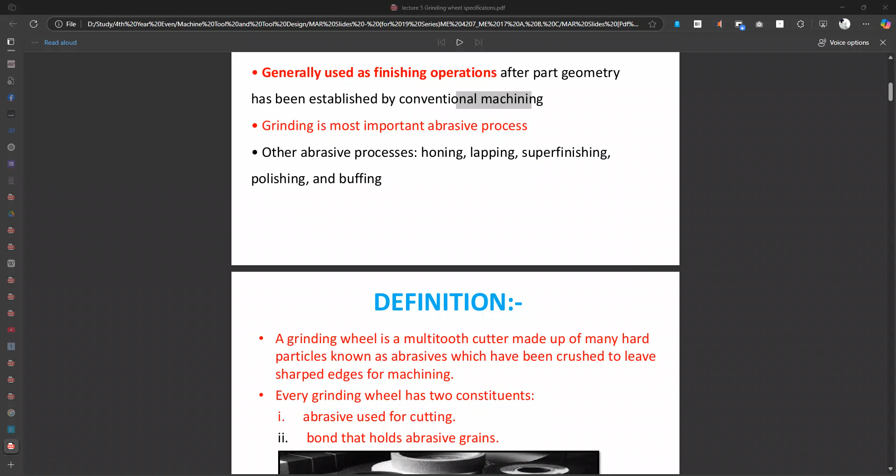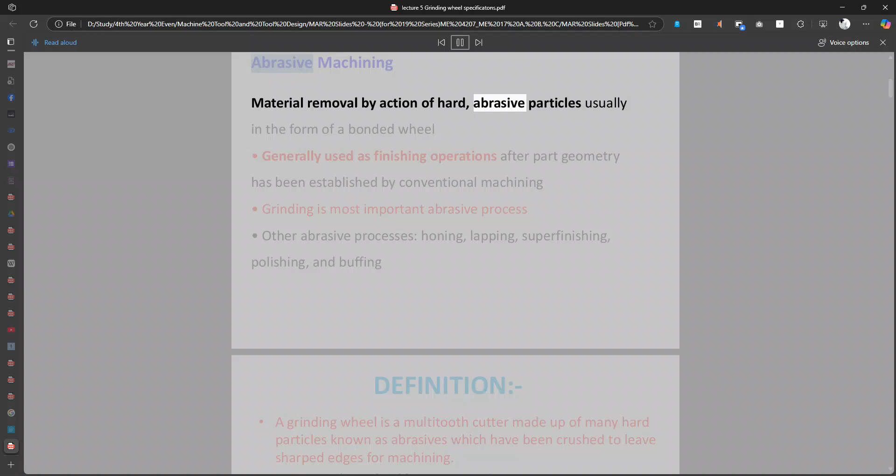Material removal by action of hard, abrasive particles, usually in the form of a bonded wheel, is generally used as a finishing operation after part geometry has been established by conventional machining.

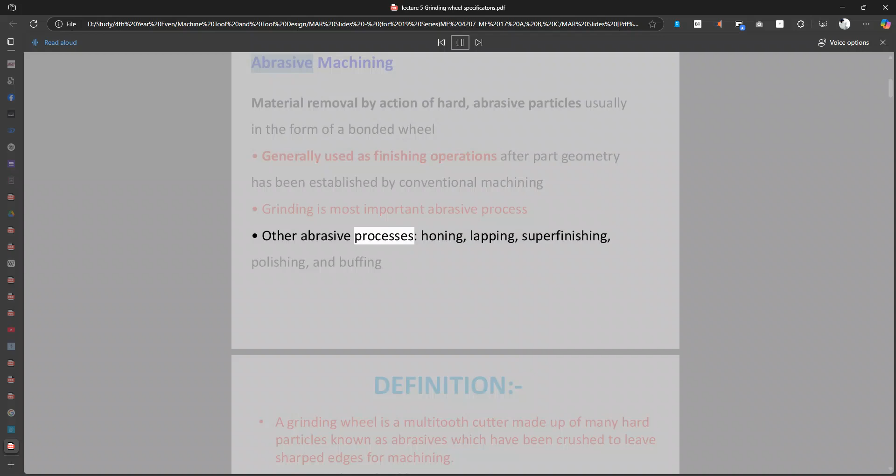Grinding is the most important abrasive process. Other abrasive processes include honing, lapping, superfinishing, polishing, and buffing.

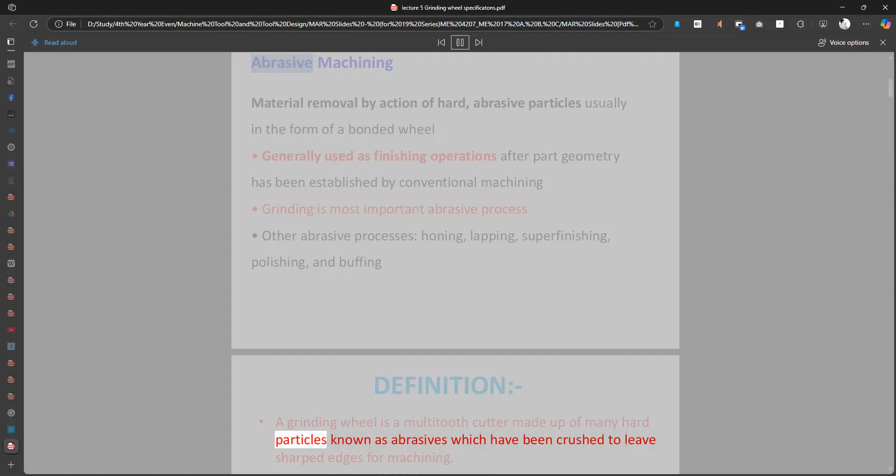Definition: a grinding wheel is a multi-tooth cutter made up of many hard particles known as abrasives, which have been crushed to leave sharp edges for machining.

Every grinding wheel has two constituents: the abrasive used for the cutting point, and the bond that holds the abrasive grains.

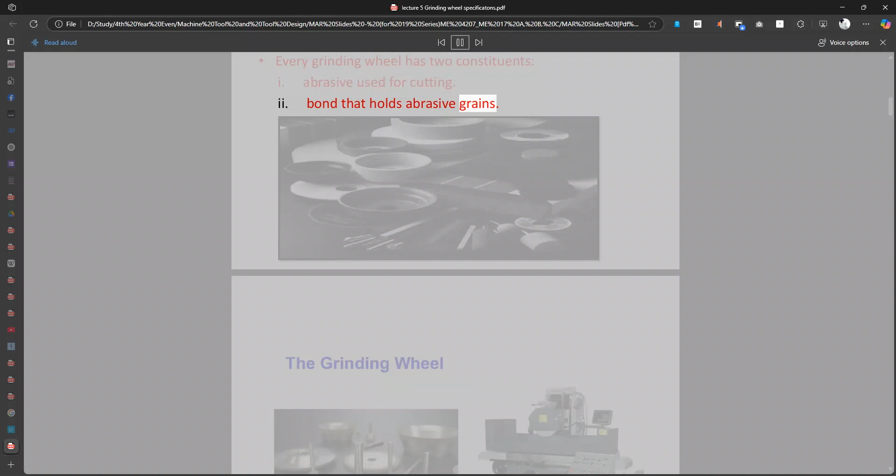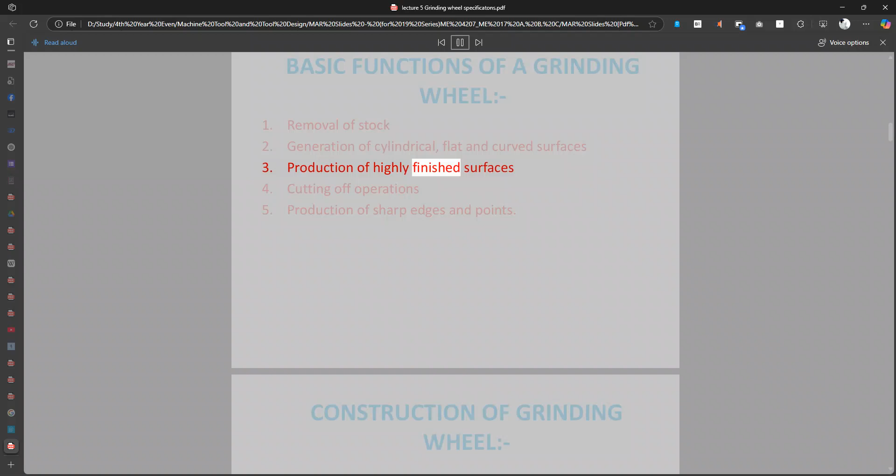Basic functions of a grinding wheel: 1. Removal of stock. 2. Generation of cylindrical, flat and curved surfaces. 3. Production of highly finished surfaces. 4. Cutting off operations. 5. Production of sharp edges and points.

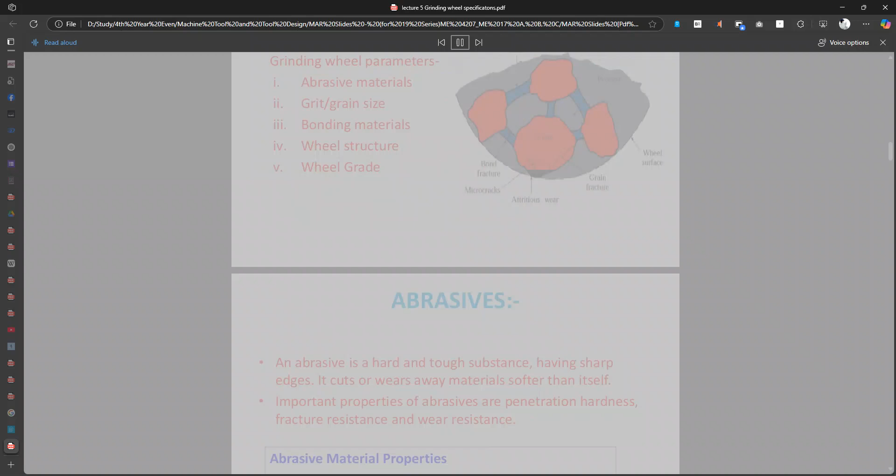Construction of grinding wheel. Grinding wheel parameters: abrasive material, grit or grain size, bonding material, wheel structure, and wheel grade.

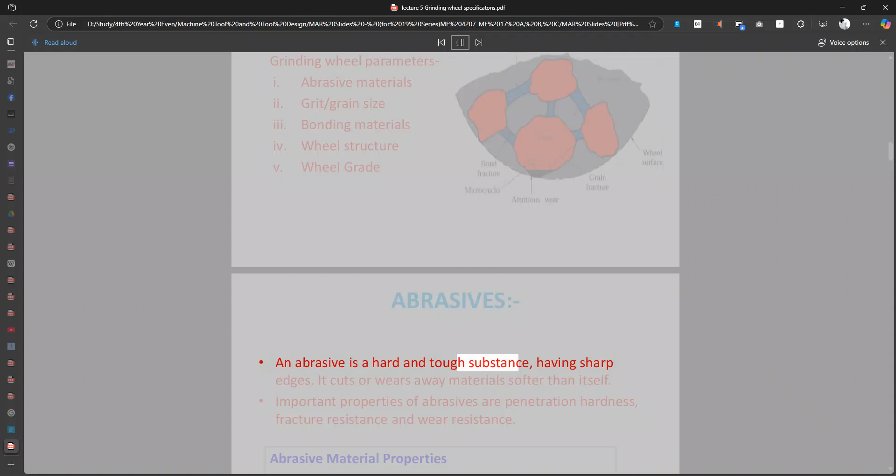Abrasives: an abrasive is a hard and tough substance, having sharp edges. It cuts or wears away materials softer than itself. Important properties of abrasives are penetration hardness, fracture resistance, and wear resistance.

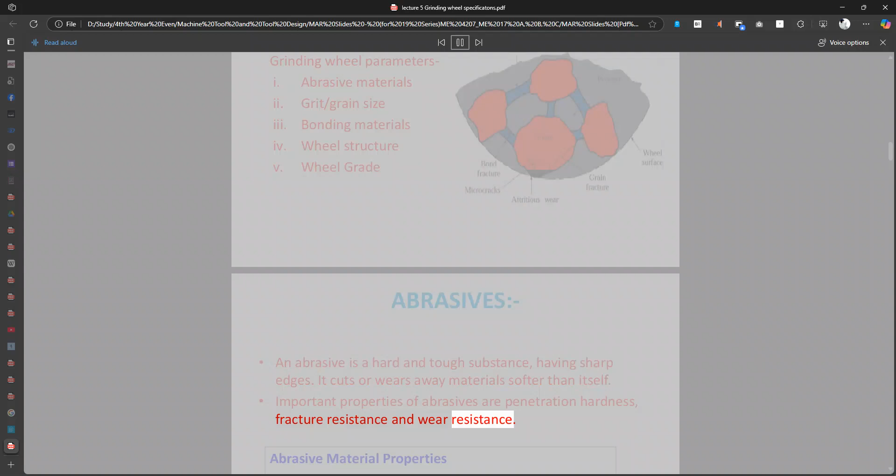Abrasive material properties: high hardness, wear resistance, toughness, and friability—the capacity to fracture when the cutting edge dulls, so a new sharp edge is exposed. Abrasive-workpiece material compatibility: the affinity of an abrasive grain to the workpiece material is important.

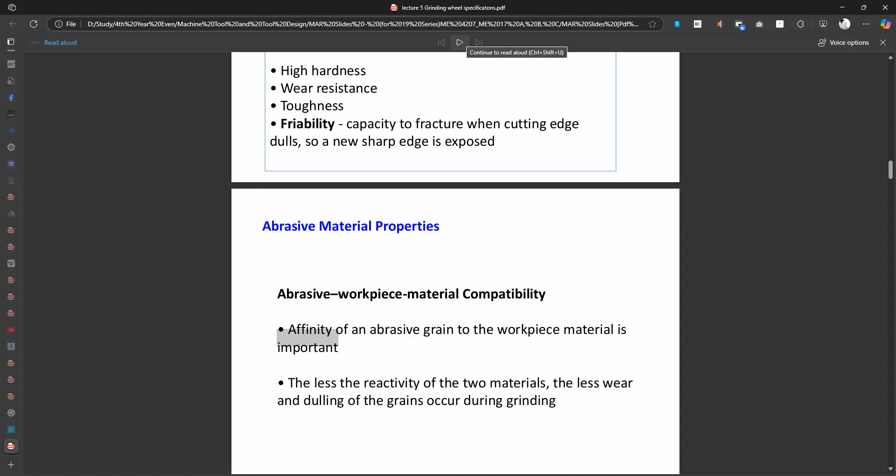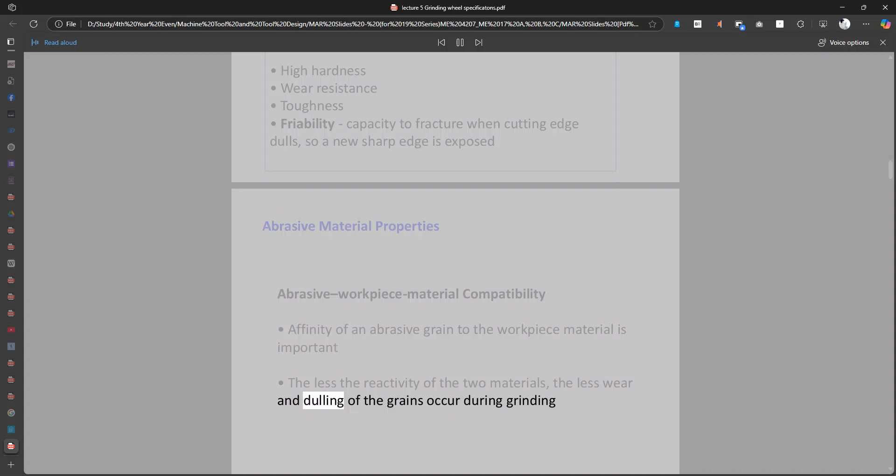The less the reactivity of the two materials, the less wear and dulling of the grains occur during grinding.

Abrasive material properties. Types of abrasives: natural abrasives, obtained from nature. Natural abrasives include sandstone, emery, corundum, diamond and garnet.

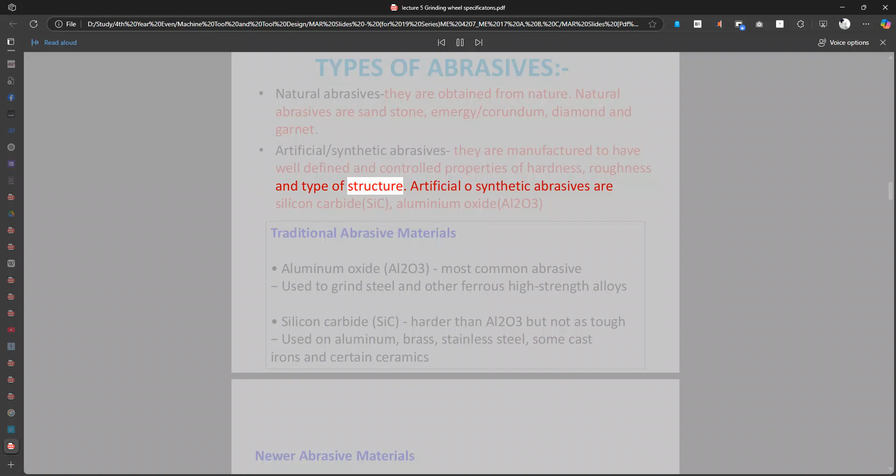Artificial or synthetic abrasives are manufactured to have well-defined and controlled properties of hardness, roughness, and type of structure. They include silicon carbide (SiC) and aluminium oxide (Al2O3). Aluminium oxide is the most common abrasive used to grind steel and other ferrous high-strength alloys.

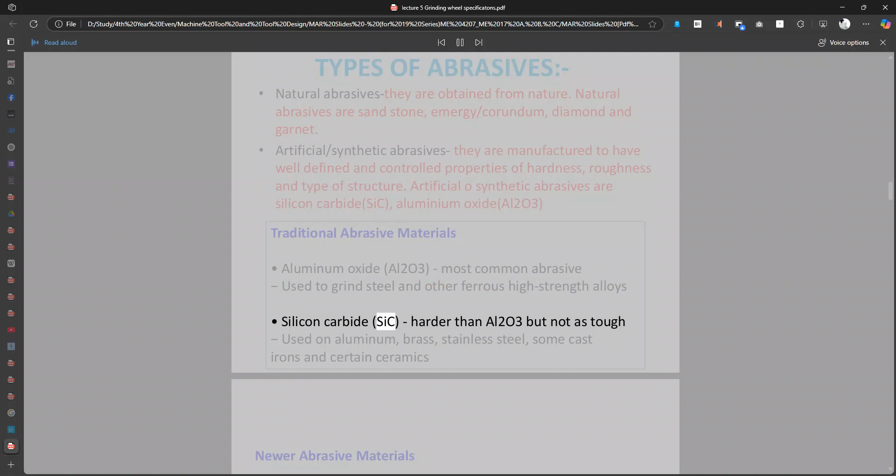Silicon carbide (SiC) is harder than Al2O3, but not as tough. It is used on aluminum, brass, stainless steel, some cast irons and certain ceramics.

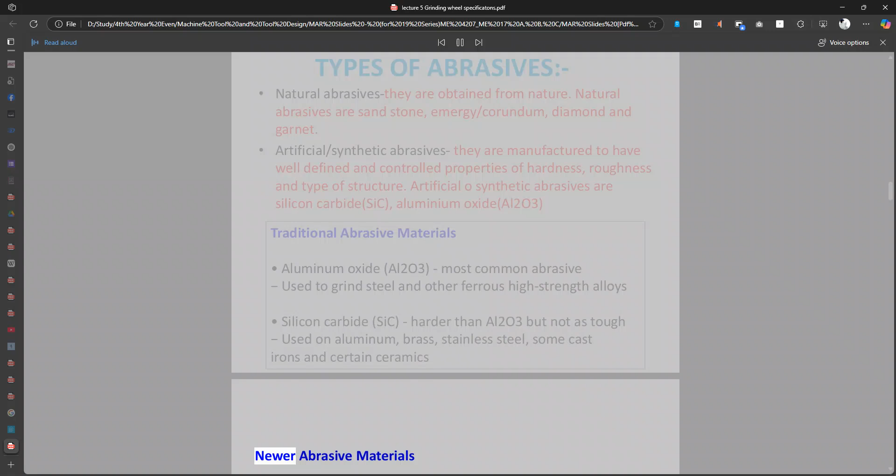New abrasive materials: cubic boron nitride (CBN), very hard and very expensive, suitable for steels, used for hard materials such as hardened tool steels and aerospace alloys, e.g. Ni-based alloys.

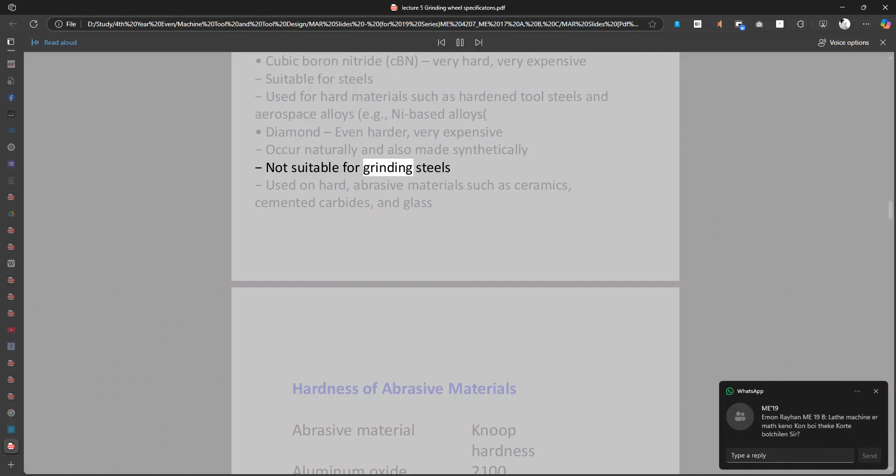Diamond is even harder and very expensive. It occurs naturally and is also made synthetically. It is not suitable for grinding steels, but is used on hard, abrasive materials such as ceramics, cemented carbides, and glass.

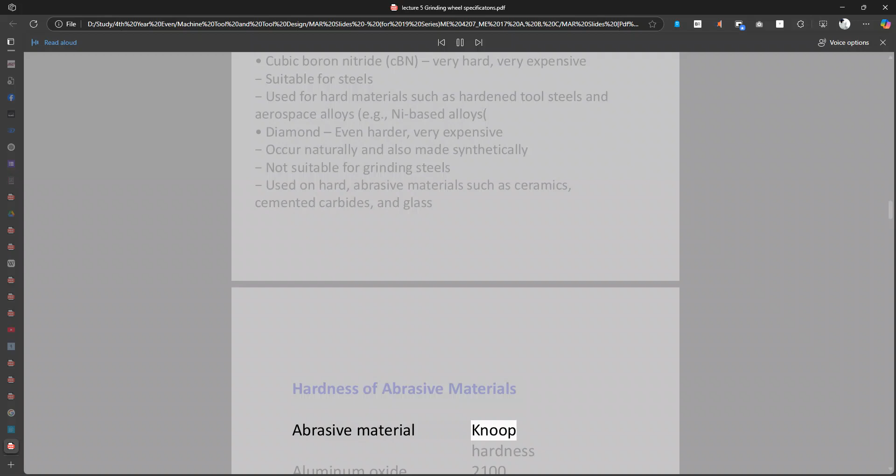Hardness of abrasive materials is measured in Knoop hardness. Next parameter: grit or grain size.

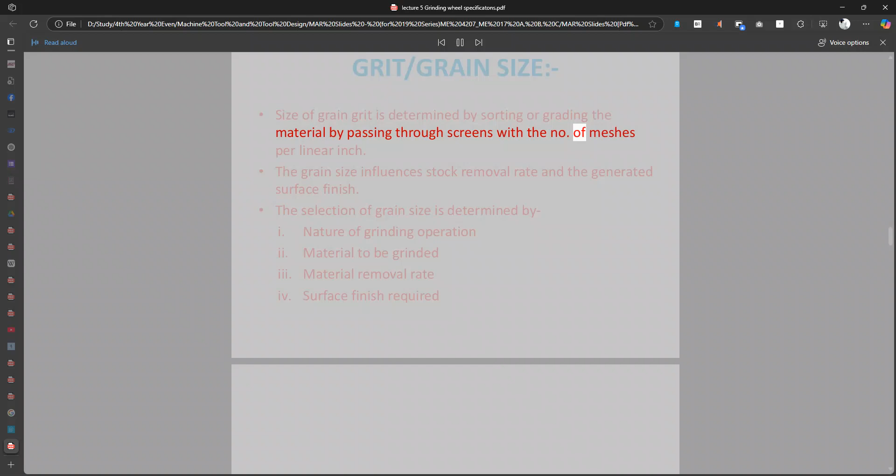The size of the grain or grit is determined by sorting or grading the material by passing it through screens with a given number of meshes per linear inch. The grain size influences the stock removal rate and the generated surface finish.

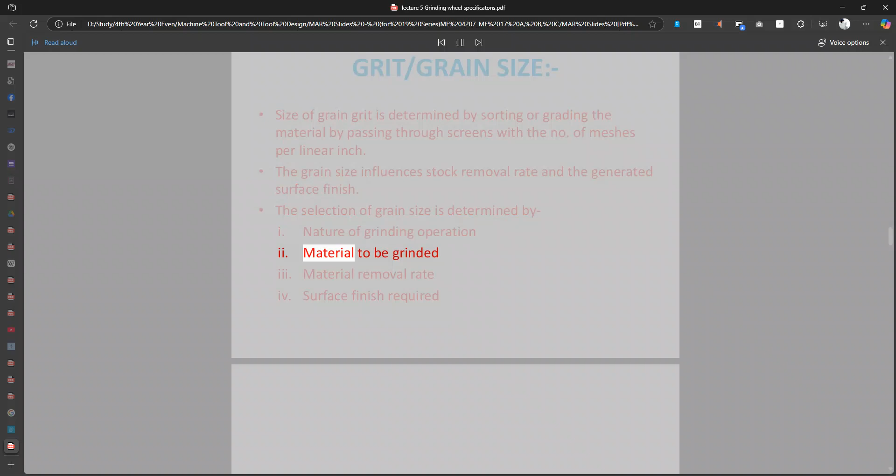The selection of grain size is determined by: the nature of the grinding operation, the material to be ground, the material removal rate, and the surface finish required.

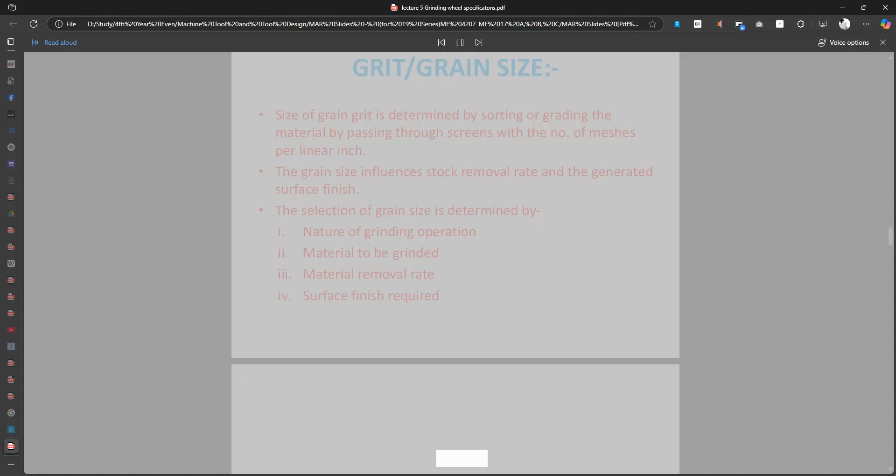Grain size: small grit sizes produce better finishes, while larger grit sizes permit larger material removal rates. Harder work materials require smaller grain sizes, while softer materials require larger grit sizes to cut effectively.

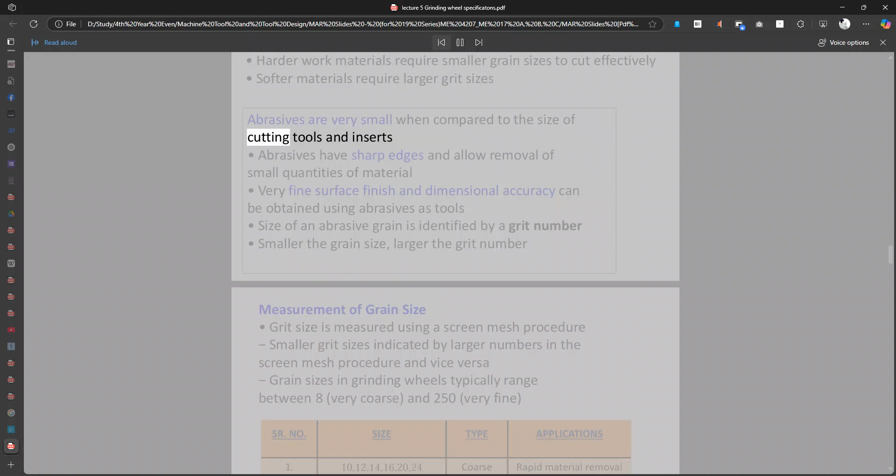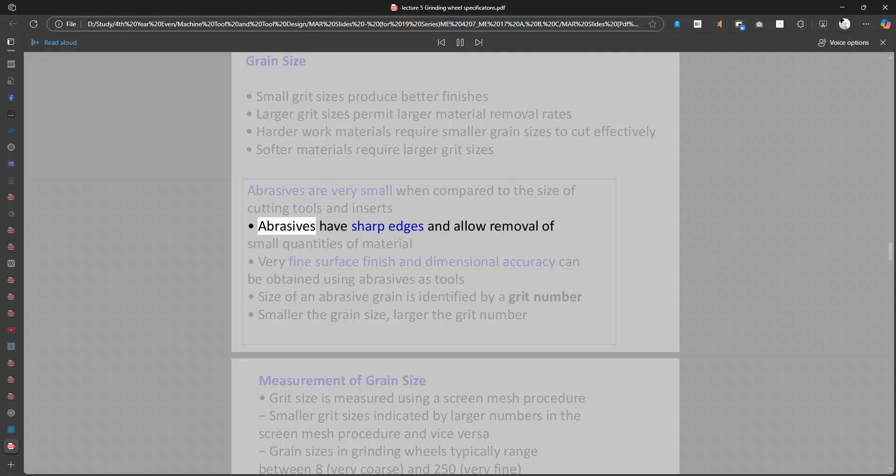Abrasives are very small when compared to the size of cutting tools and inserts. Abrasives have sharp edges and allow removal of small quantities of material. Very fine surface finish and dimensional accuracy can be obtained using abrasives as tools.

The size of an abrasive grain is identified by a grit number: the smaller the grain size, the larger the grit number.

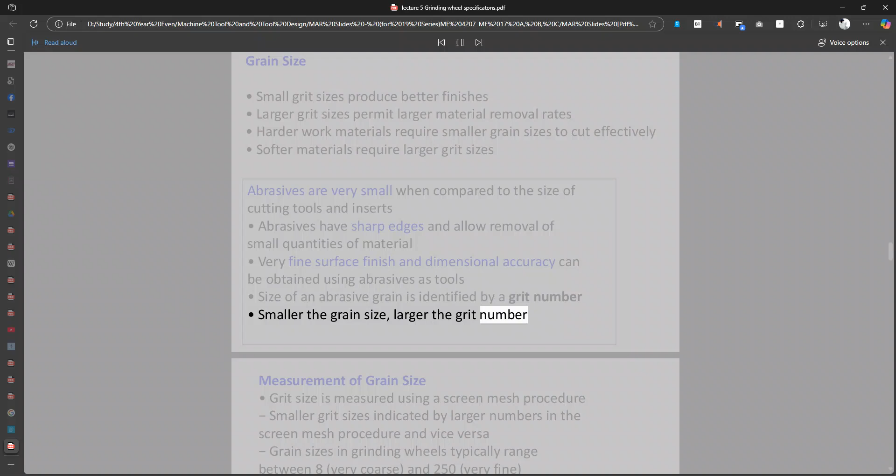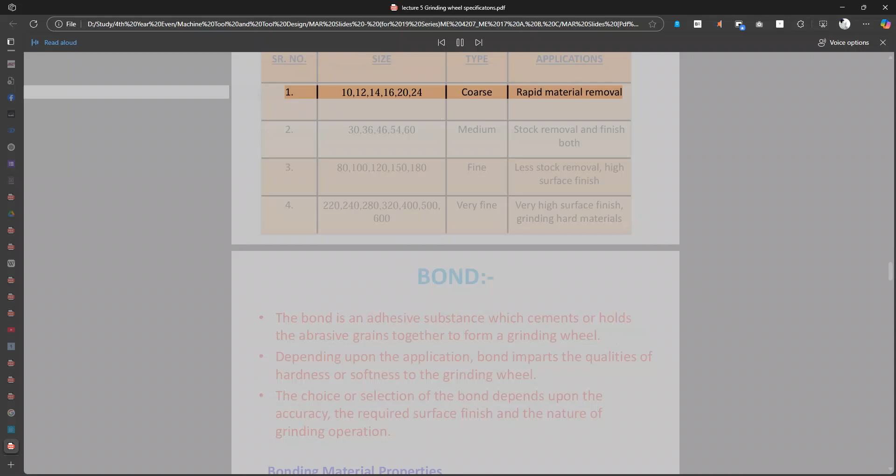Grit size chart: No. 1 - sizes 10, 12, 14, 16, 20, 24, type coarse, used for rapid material removal. No. 2 - sizes 30, 36, 46, 54, 60, type medium, used for stock removal and finish both. No. 3 - sizes 80, 100, 120, 150, 180, type fine, used for less stock removal and high surface finish. No. 4 - sizes 220, 240, 280, 320, 400, 500, 600, type very fine, used for very high surface finish and grinding hard materials.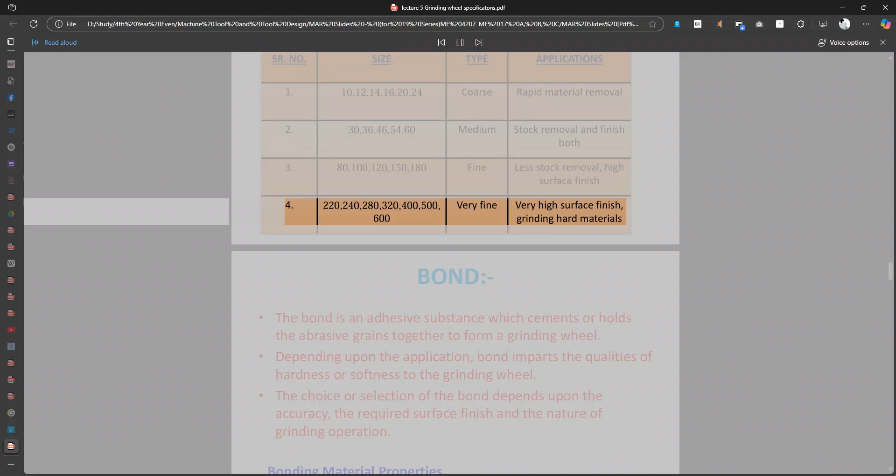Measurement of grain size, or grit size, is done using a screen mesh procedure. A smaller grit size is indicated by a larger number in the screen mesh procedure, and vice versa. Grain sizes in grinding wheels typically range between 8, which is very coarse, and 250, which is very fine.

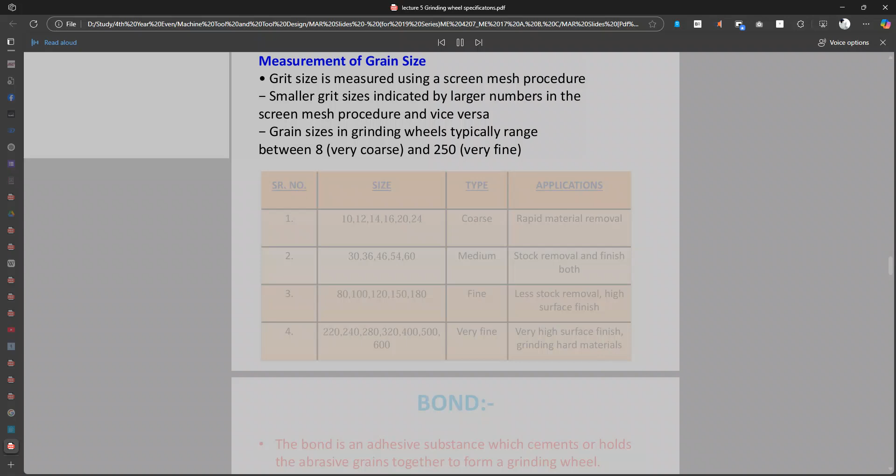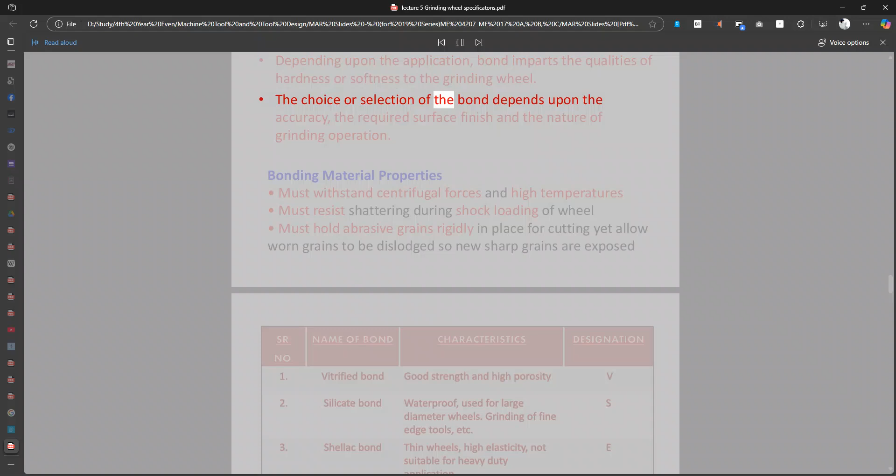The bond is an adhesive substance which cements or holds the abrasive grains together to form a grinding wheel. Depending upon the application, bond imparts the qualities of hardness or softness to the grinding wheel. The choice of bond depends upon the accuracy, the required surface finish, and the nature of the grinding operation.

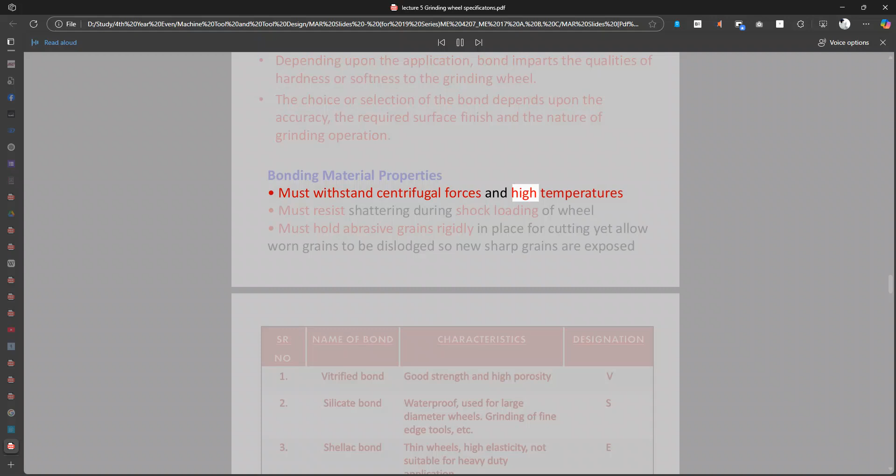Bonding material properties: must withstand centrifugal forces and high temperatures, must resist shattering during shock loading of the wheel, must hold abrasive grains rigidly in place for cutting, yet allow worn grains to be dislodged so new sharp grains are exposed.

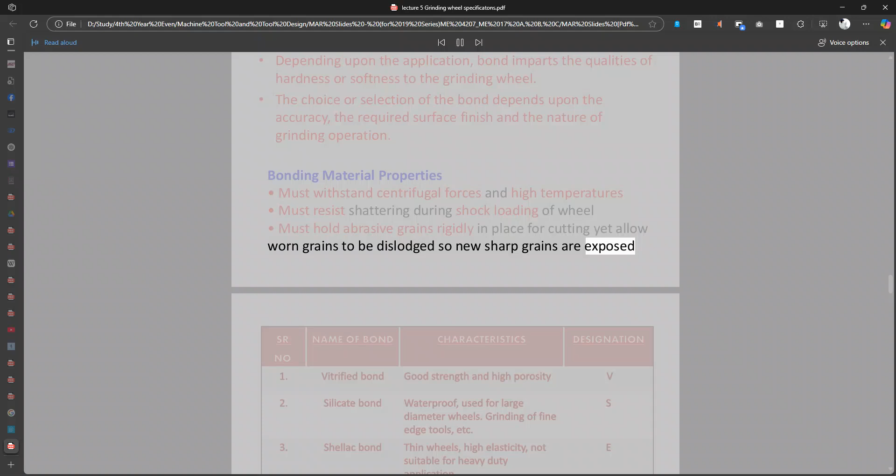Name of bond, characteristics, designation. 1. Vitrified bond: good strength and high porosity, designation V. 2. Silicate bond: waterproof, used for large diameter wheels and grinding of fine edge tools, designation S. 3. Shellac bond: thin wheels, high elasticity, not suitable for heavy duty application.

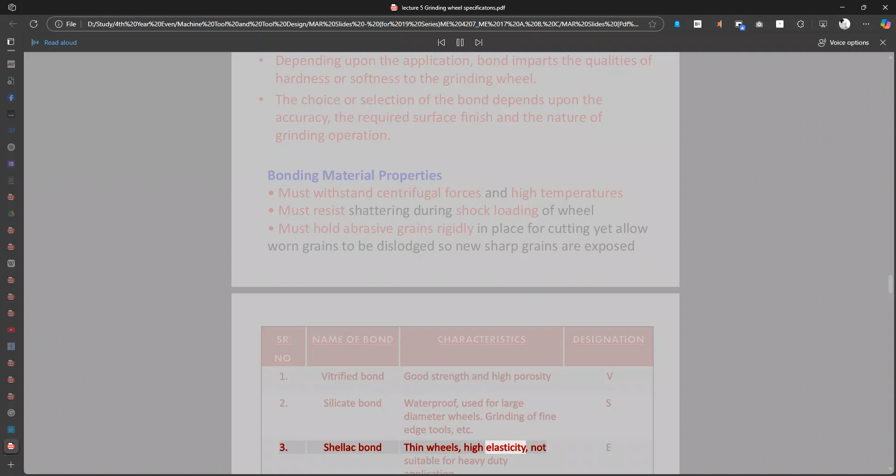4. Resinoid bond: rough grinding, high speed grinding, designation B. 5. Rubber bond: thin wheels, fine finishing and polishing, e.g. ball bearing races, designation R. 6. Oxychloride bond: disc grinders, less brittle, designation O.

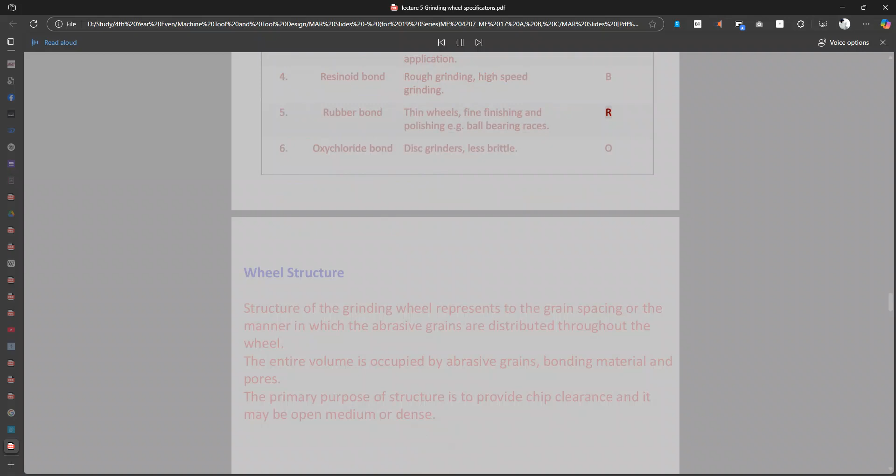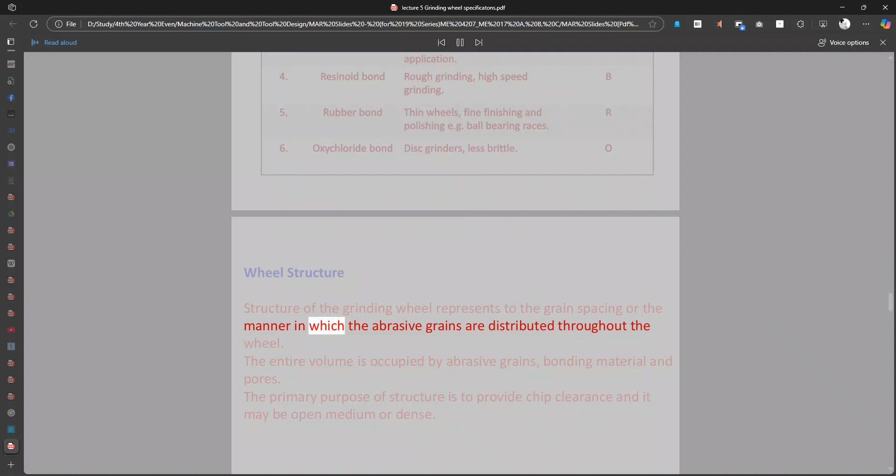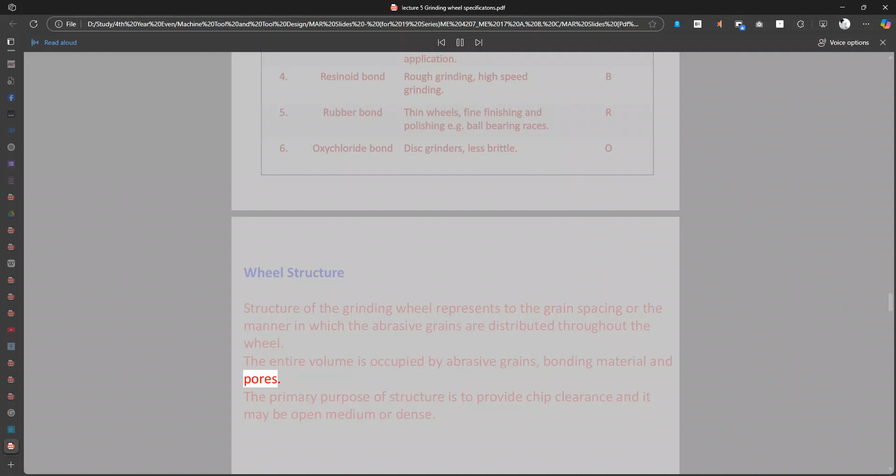Wheel structure. Structure of the grinding wheel refers to the grain spacing, or the manner in which the abrasive grains are distributed throughout the wheel. The entire volume is occupied by abrasive grains, bonding material, and pores. The primary purpose of structure is to provide chip clearance, and it may be open, medium, or dense.

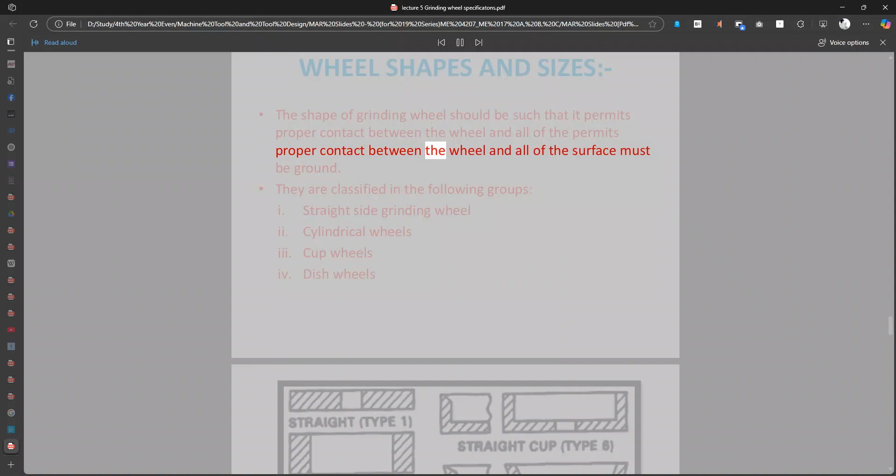Wheel shapes and sizes. The shape of the grinding wheel should be such that it permits proper contact between the wheel and all of the surface to be ground. They are classified into the following groups: straight side grinding wheel, cylindrical wheel, cup wheel, and dish wheels.

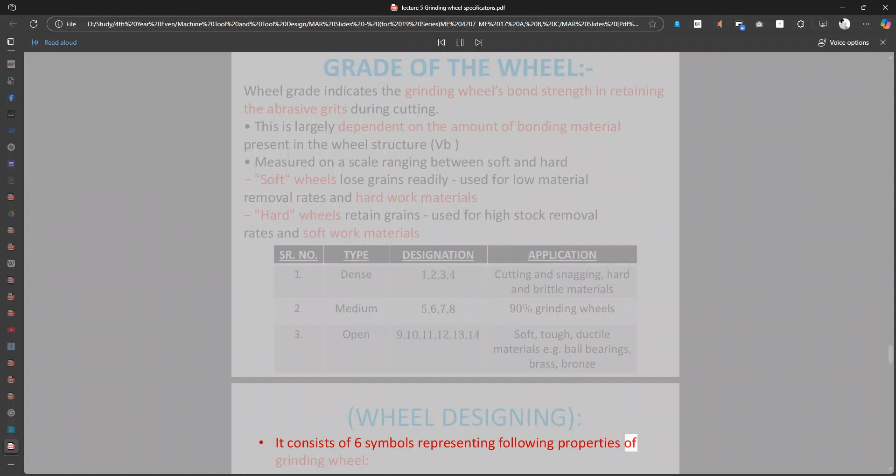Wheel designation consists of 6 symbols representing the following properties of the grinding wheel: manufacturer symbol, type of abrasive, grain size, grade, structure, type of bond, and manufacturer symbol, optional for reference.

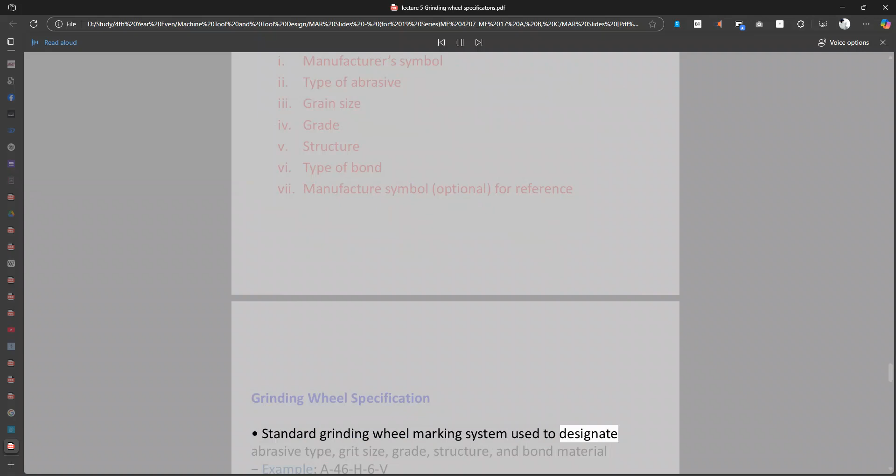Grinding wheel specification: a standard grinding wheel marking system used to designate abrasive type, grit size, grade, structure, and bond material. Example: A46H6V also provides for additional identifications for use by grinding wheel manufacturers.

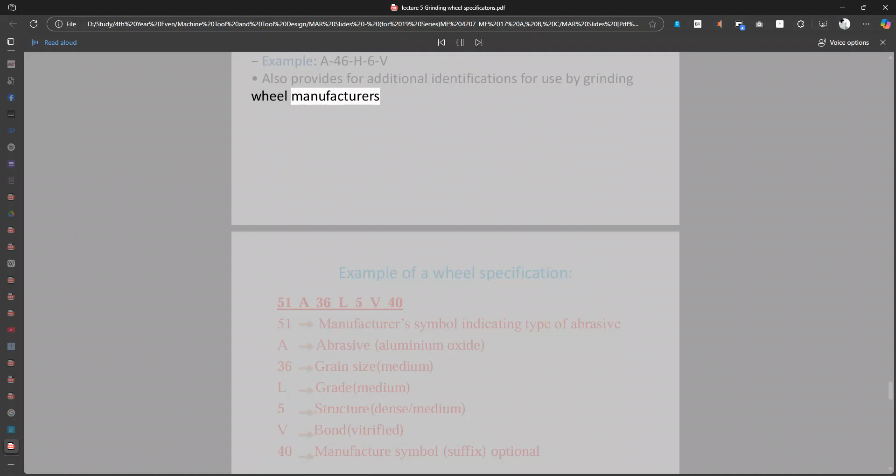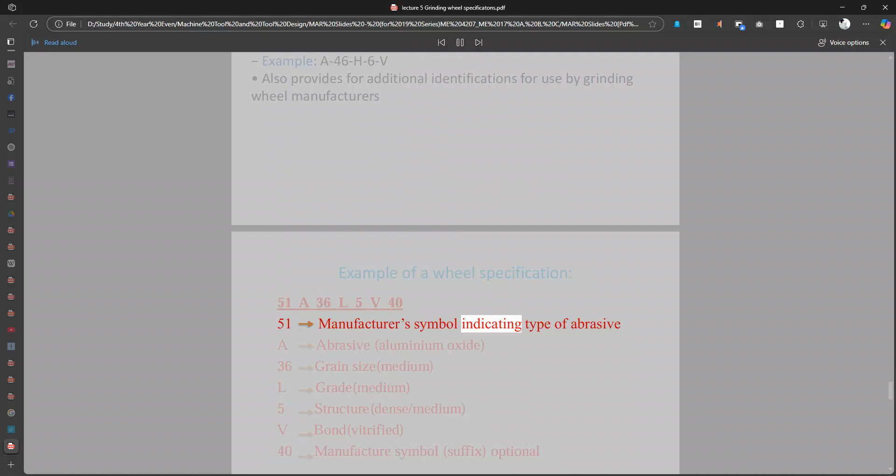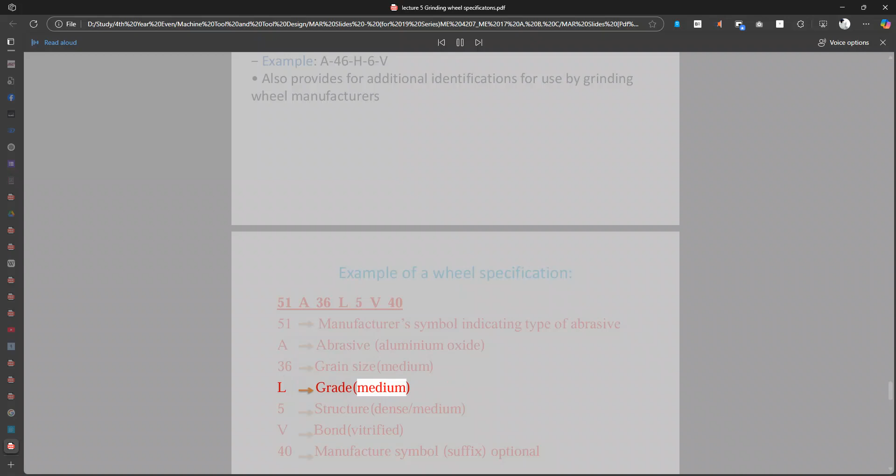Example of a wheel specification: 51 A36L5V40. 51 is the manufacturer's symbol indicating type of abrasive. A is abrasive, aluminium oxide. 36 is grain size, medium. L is grade, medium. 5 is structure, dense to medium. V is bond, vitrified. 40 is the manufacturer's symbol suffix, optional.

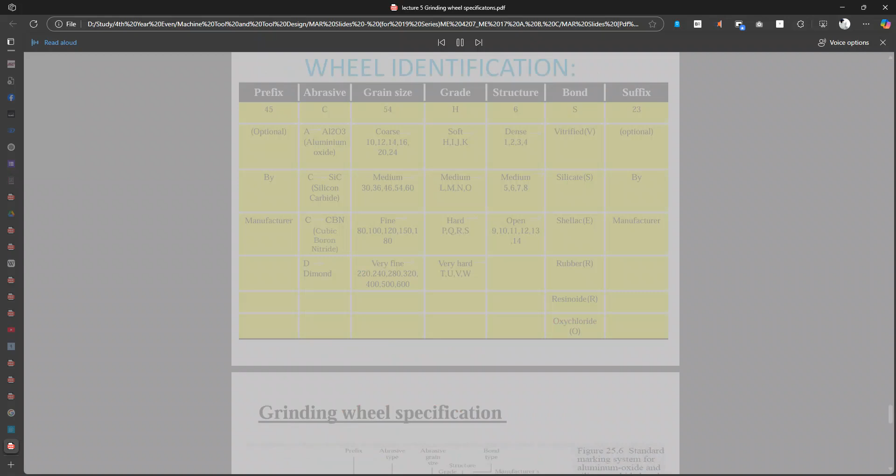Wheel identification: prefix, abrasive, grain size, grade, structure, bond, suffix. Example: 45C54H6S23, optional.

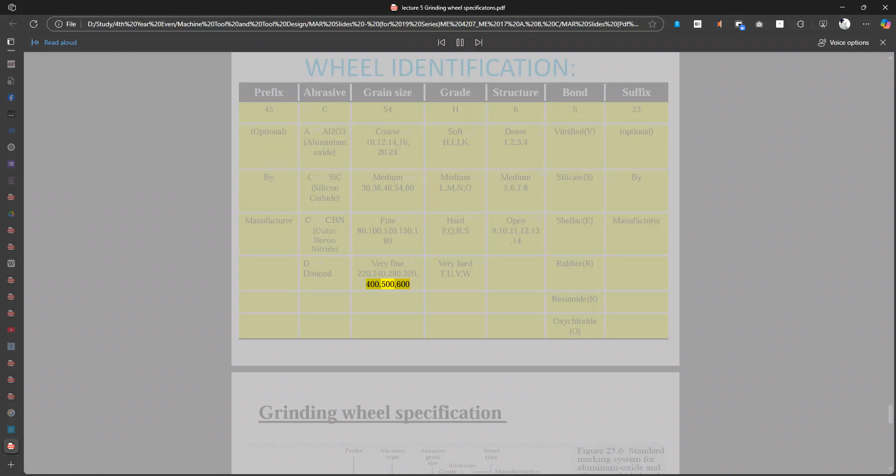A, Al2O3, aluminium oxide: coarse grain sizes 10, 12, 14, 16, 20, 24; soft grades H, I, J, K; dense structures 1, 2, 3, 4; vitrified bond V, optional by manufacturer. C, silicon carbide: medium grain sizes 30, 36, 46, 54, 60; medium grades L, M, N, O; medium structures 5, 6, 7, 8; silicate bond S, by manufacturer. CBN, cubic boron nitride: fine grain sizes 80, 100, 120, 150, 180; hard grades P, Q, R, S; open structures 9, 10, 11, 12, 13, 14; shellac bond E, by manufacturer. Diamond: very fine grain sizes 220, 240, 280, 320, 400, 500, 600; very hard grades T, U, V, W; rubber bond R, resinoid bond B, oxychloride bond O.

Grinding wheel specification.

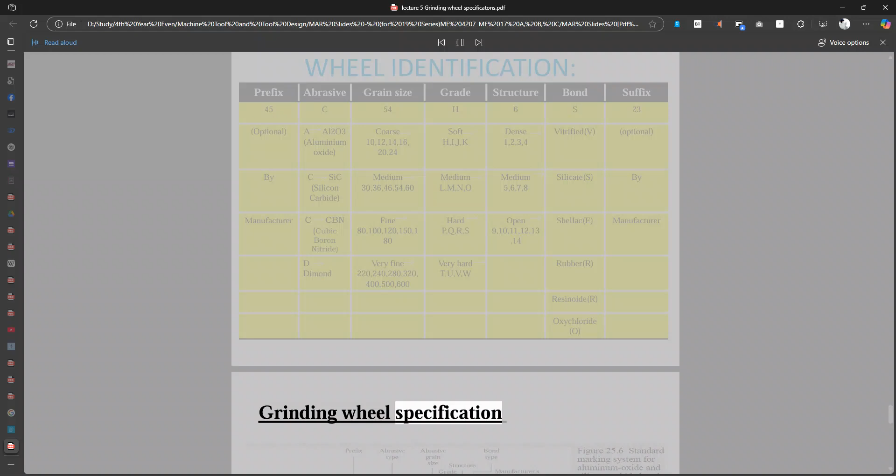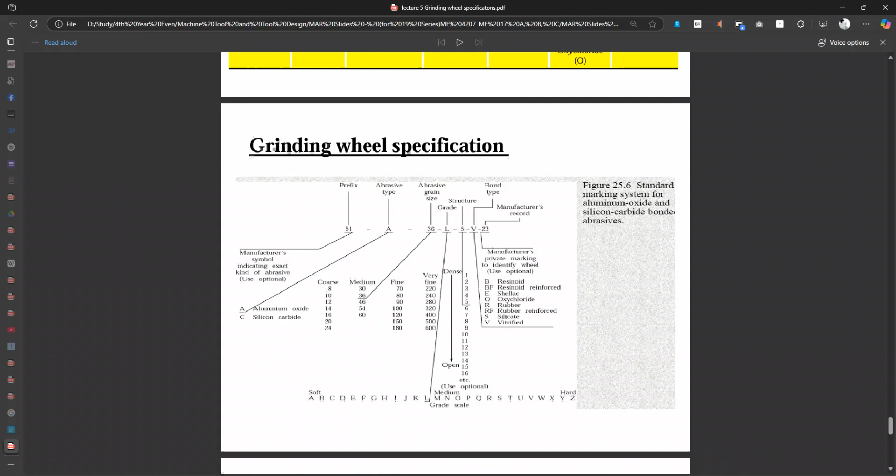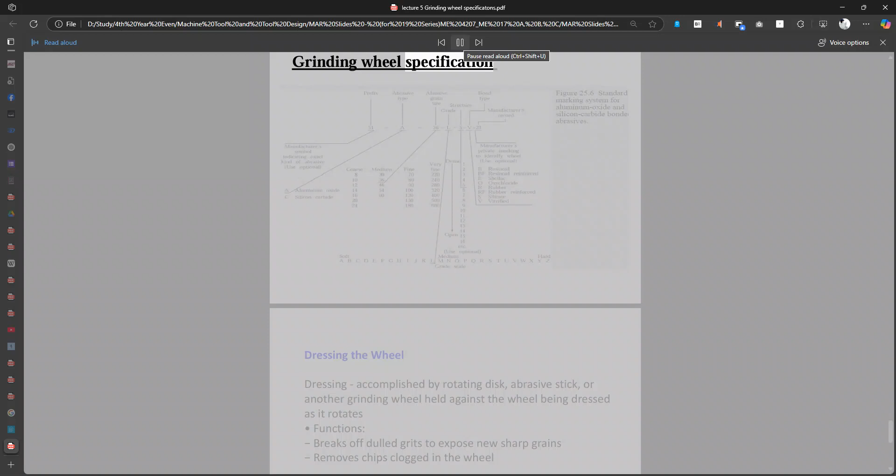Grinding wheel specification. Dressing the wheel: dressing is accomplished by rotating a disc, abrasive stick, or another grinding wheel held against the wheel being dressed. As it rotates, functions include breaking off dulled grits to expose new sharp grains, and removing chips clogged in the wheel.

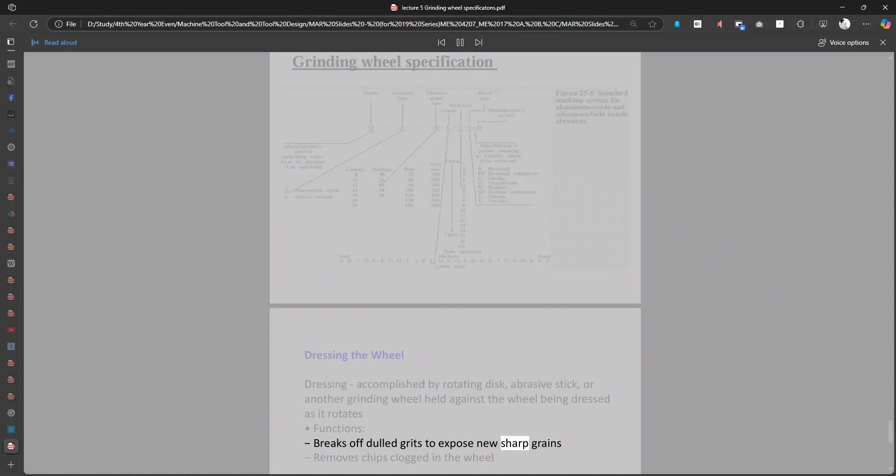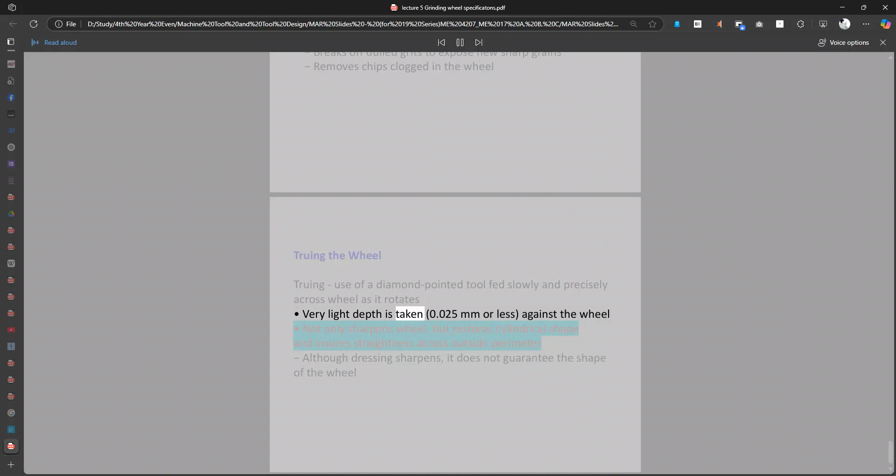Truing the wheel: truing uses a diamond-pointed tool fed slowly and precisely across the wheel as it rotates. A very light depth is taken, 0.025 mm or less, against the wheel. Truing not only sharpens the wheel but restores its cylindrical shape and ensures straightness across the outside perimeter. Although dressing sharpens the wheel, it does not guarantee its shape.